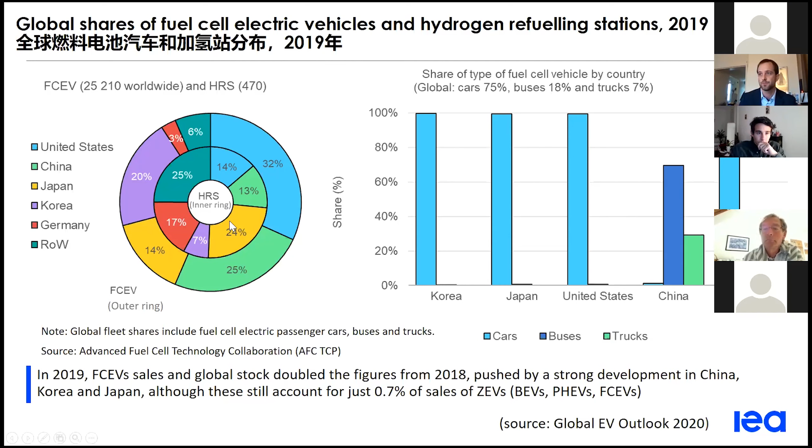But it crucially also includes heavy duty vehicles with high energy and power needs operating on fixed and ideally hub and spoke routes and fueling at single and large hydrogen refueling stations. And by going the route of commercial vehicles that operate intensively as opposed to private cars that stay parked 95% of the time, and by taking advantage of byproduct hydrogen from chemical industries like chlor-alkali production, China has found a niche where the high initial capital costs of rolling out vehicles and their infrastructure are offset by delivering hydrogen at low prices.

So where do we stand then in terms of what many countries are hoping is the initial stage in a ramp up of fuel cell electric vehicles that will mirror in a lot of ways the rapid market adoption that we saw with battery and plug-in hybrids? In terms of vehicle stock, we went from just under 13,000 fuel cell vehicles on the road in 2018 to more than 25,000 in 2019, almost a doubling. But if we compare this to the 7.2 million EV cars and 2 million EV car sales, then we see that the lag between fuel cell electric vehicles and battery or plug-in vehicles is a little less than a decade. This means that 0.7% of all zero emission vehicle sales globally in 2019 were fuel cell electric vehicles.

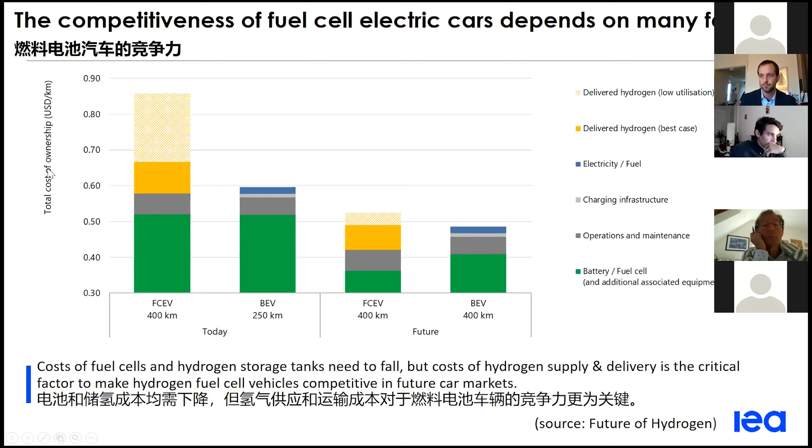Range extenders, as I mentioned, are already being extensively used in various regions of China, Rugao included, where their high utilization plus the availability of affordable hydrogen makes them a valuable asset for the fleet managers that want to maximize the utilization of their assets. In the long term, the mix of low carbon fuels and powertrains will be determined by the trajectory of cost reductions and performance improvements, including in energy and power density, as well as the durability of batteries and fuel cells, and the cost of delivering these two competing energy carriers, electricity and hydrogen.

Assuming that the cost of delivering hydrogen at the pump can be brought down to less than $5 per kilogram, and also assuming that fuel cells can be mass produced to meet the performance targets envisioned by OEMs and the government, fuel cell trucks would compete favorably against battery electric trucks at ranges above around 400 to 500 kilometers, opening up a crucial niche in the regional and long-haul trucking segment, which together account for the majority of today's fuel demand in the road freight sector globally.

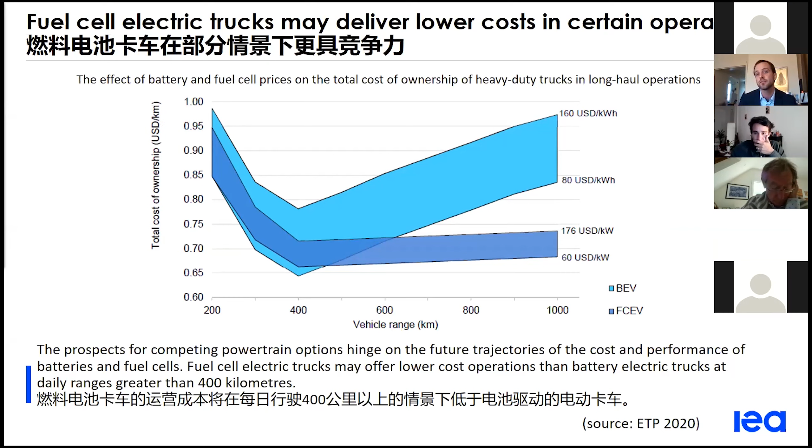Crucially, transport applications, both in the form of direct hydrogen use in fuel cell electric vehicles or hydrogen derived fuels, such as ammonia in the case of shipping or synthetic jet fuel in the case of aviation, are the main demand sector of this growth. While of course, hydrogen is critical also to decarbonizing the chemicals and heavy industry sector. By 2070, hydrogen and ammonia would need to meet more than 50% of the final energy demand in shipping and more than 40% in aviation, and around a third of the demand in road transport, mainly for the use in medium and heavy duty trucks.

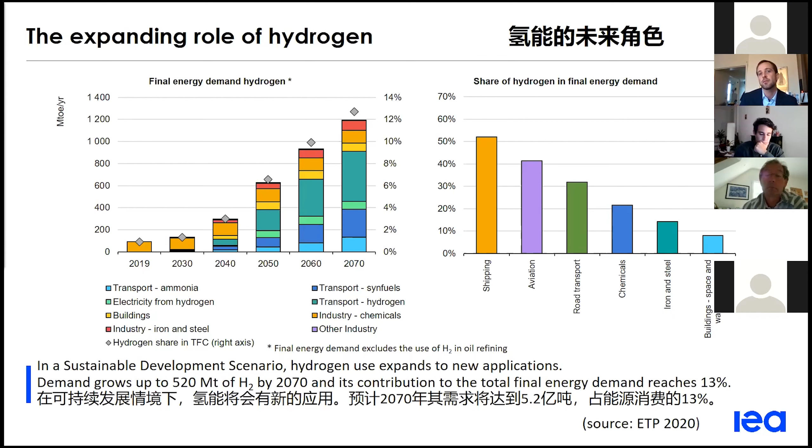In the sustainable development scenario, the rapid ramp up in low carbon hydrogen production is not achieved based on green hydrogen alone. Rather, SMR and coal gasification production will need to be equipped with CCS, or even potentially with ways of using emitted carbon, especially in the initial stages where cost barriers for electrolysis with renewable electricity are likely to simply be too high to overcome.

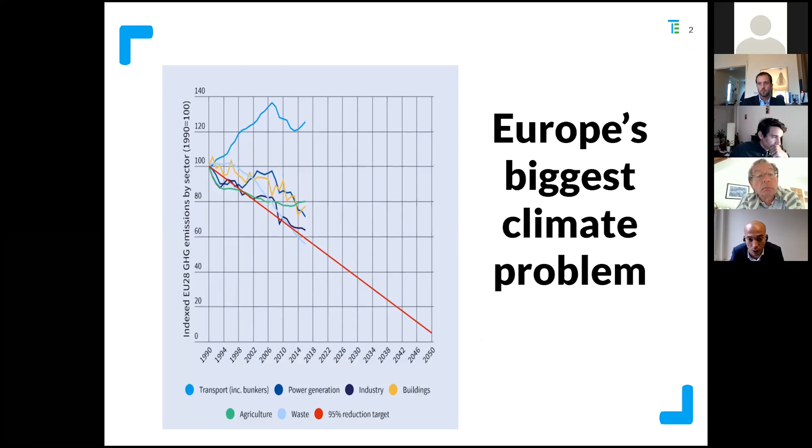I think the starting point, and this is well known to all of you, is that transport is now the biggest climate problem that we have in Europe, and I think that's true across major developed economies that transport is really the major issue we have. We haven't managed to reduce emissions since the 1990s, and actually pre-COVID, the last couple of years, emissions were going up. Now, in Europe, most of the emissions still come from passenger cars, light-duty vehicles with vans, then it's trucks, and then the two hard-to-abate sectors, aviation and shipping.

Now, our challenge is to completely decarbonize this system in the next 30 years. And what that means is that we're going to have to completely replace petroleum fuel by a different type of fuel, a zero emission fuel or zero emission energy system.

The starting point for us in this discussion, and we've been following the energy debate very closely, because the energy system is the basis for what happens in the mobility system. And the clean power revolution that we have seen over the last 15 years has completely changed the way we look at the future of the transport sector. I come from an organization where 10 years ago, we were working on fuel economy standards, on efficiency, because we wanted to optimize everything as much as we could.

The rise of clean electricity, which currently accounts for almost 60% of European electricity, has completely changed the game. And so the basis of a future zero emission mobility system will be clean electricity. Just to reiterate, we are making fantastic progress on electricity across the world, but also particularly in Europe. Now, there are two main options in the transport system to decarbonize based on electricity. Either you do it directly or you do it indirectly. I think that's well known to all of you.

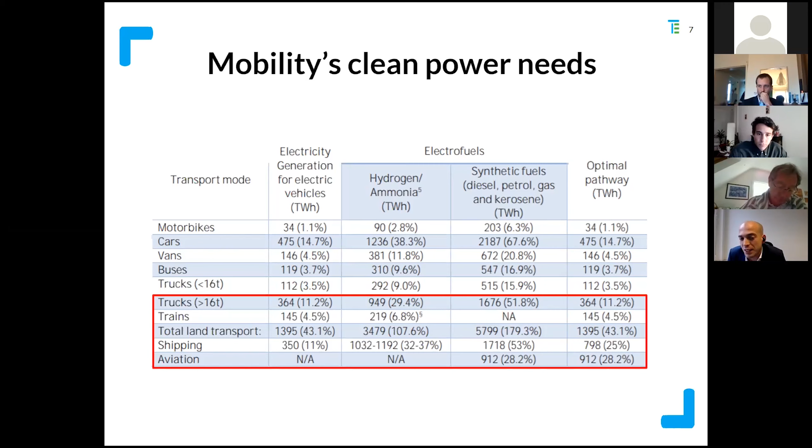Now, I think it is not for us as a green group, or maybe not even up to policymakers, to specifically decide which technologies are used in which sectors. I think we need to give the market a chance, but I think it's an important consideration. If we would go for a complete hydrogen economy, the electricity needs would be incredible.

Now, there's a big discussion also, and that was shown in the IEA slides, we're not just talking about green hydrogen, we're also talking about blue hydrogen. There is potentially a role for blue hydrogen, but there are also some serious concerns about the ability of blue hydrogen to actually achieve the emission reductions that we need to go towards a Paris compliant world. And if you look at this slide, some of the emissions associated with blue hydrogen can maybe be mitigated further, lowered further, but it's a real concern.

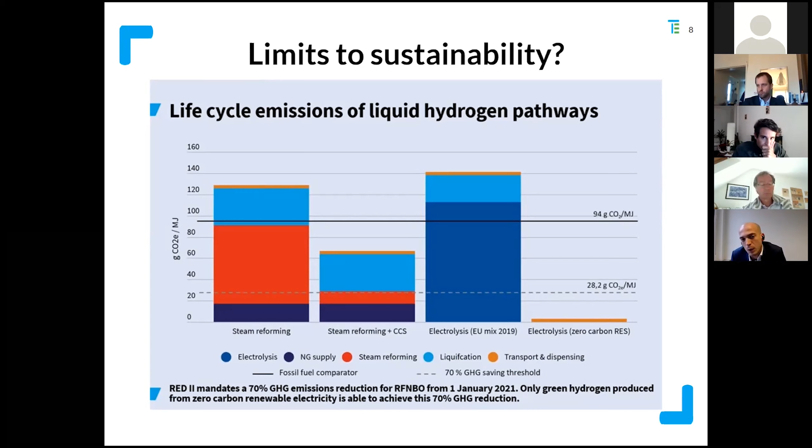Now let me go through the different modes, and let me start with the modes, though I actually want to spend most of my time talking about trucks, because that's what I'm most interested in at this stage, where I have a number of questions also to the other panelists. But where I think it's pretty straightforward is the passenger car sector.

If you look at the European car market, not my opinion, not anyone else's opinion, you just look at what car makers are planning to produce in the next 5 years. They're not planning to produce any significant number of fuel cell vehicles. If they're not planning to produce them, they're not planning to sell them, and that to me says that the race in the passenger car market, as far as I can tell, is essentially over in Europe.

And I think it might well be true that the type of scale up that you need is similar to where we were with cars 10 years ago. But meanwhile, the battery electric sector has advanced quite a lot. If you look at the investments that are happening right now, the gigafactories that are being built, I think it's going to be extremely hard, if not impossible, for hydrogen cars to catch up.

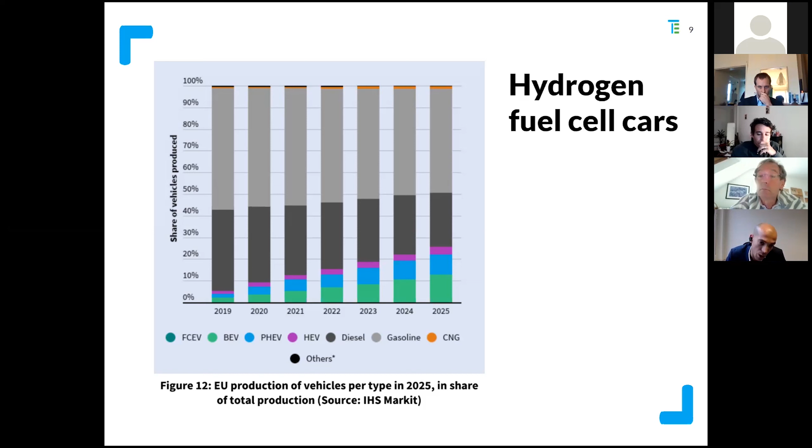Where I think it's also pretty straightforward is the aviation sector, and I very much agree with the analysis that was shown by the IEA. In aviation, there is no alternative to hydrogen or hydrogen-derived fuels, particularly drop-in fuels such as e-fuel, synthetic kerosene. I think it's really encouraging to see that the European Commission is considering a mandate that would require airlines to start using a progressively growing share of sustainable aviation fuels, but in particular also hydrogen-based e-fuels.

The situation for the shipping industry is very similar. Shipping cannot conceivably be decarbonized by direct electrification. You cannot do biofuels at the scale that is required to supply that sector with energy. So the only scalable and sustainable option that you have at your disposal is either hydrogen or a hydrogen-derived fuel such as ammonia.

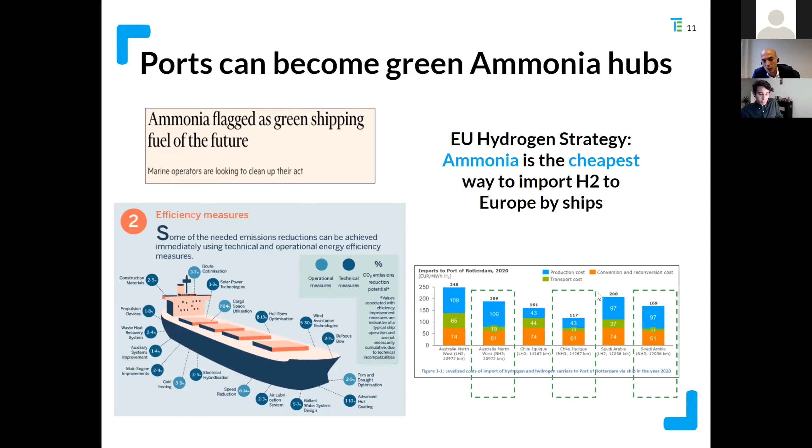Now, let me focus the rest of the presentation on the heavy-duty segment, because this is really where most of the discussion in Brussels is focusing. We have no view on whether it should be battery electric or hydrogen, but we've been trying to understand what the pros and cons of the two solutions are. And based on the modeling and the estimates that we make, we think that actually it's a very, very close race. I'll share the slides so that everybody can have a look at the assumptions, and you can criticize them and tell us that we need to change them.

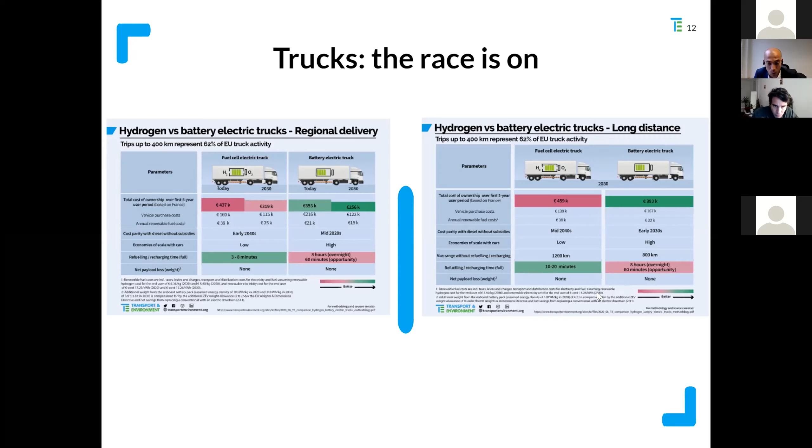But the main thing that hydrogen has going for it is that, from a refueling point of view, it is just much quicker, and the flexibility it gives to the haulage sector is much greater than battery electric potentially. From an economic point of view, we actually think that battery electric trucks could be quite competitive. We also think that the weight issue that has been much talked about is much smaller than people think, because weight exemptions have been granted to heavy duty vehicles in Europe, which means that most of the additional weight of the battery of the truck, you don't have to count it according to EU regulations. So there's no weight penalty from battery trucks.

Now, if you look at what I see as the main challenges for the two technologies, I think it's clear that for battery electric trucks, there's a big issue with range and a big issue with charging. But the idea that we could run trucks on batteries for 400 or 500 kilometers is no longer inconceivable. There was the announcement by Tesla some years ago, but now we see that European manufacturers such as Daimler, the biggest truck maker in the world, are also coming forward with a 400-kilometer battery electric truck. And so as the costs go down and as the density of the batteries goes up, to go to vehicles that can do 500, 600, 700 kilometers on a single charge is no longer inconceivable.

Then the issue becomes, can you roll out a charging network that is sufficient to supply those big trucks with the big energy needs they have? I think that is one of the main questions. There's also a question on grid stability, and the question is, can we get sufficient scale in batteries to reduce the costs so that it becomes attractive for the trucking sector? I think similar concerns exist on the other side.

On the hydrogen side, the question is, can you get the cost of the hydrogen fuel distributed and delivered at the pump down low enough to make it cost competitive and attractive for the haulier? Can you roll out a hydrogen refueling system across Europe? Can you get the hydrogen from the big pipelines? Because people now seem to think that the cheapest, most convenient way to ship hydrogen around is a pipeline. So how are we going to get hydrogen to places where we don't have pipelines? And I think this is really my main question. Can we get the scale for the fuel cells and for the tanks in what is, in the end, a relatively small sector? The logic was always we're going to get scale in the passenger car segment.

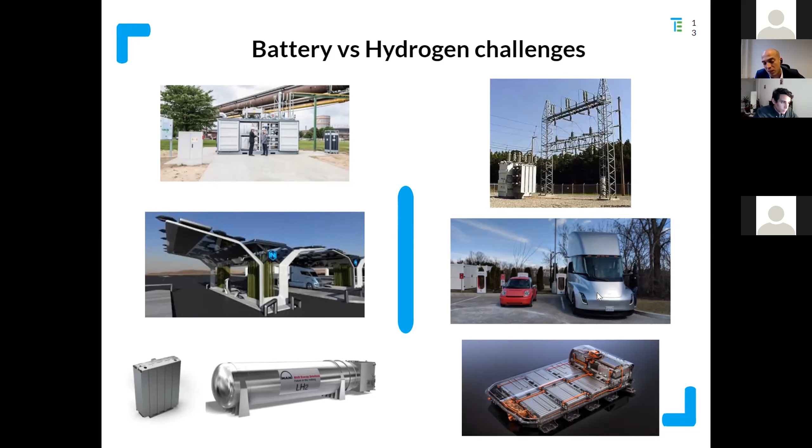In Europe, that's 15 million cars a year. That's a lot. It's a lot of vehicles. If we have to do this with what is only part of the trucking sector, can we still get the scale and can we still get the cost down? Those are questions. And then also a reminder.

Actually, a lot of time is spent talking about ultra long haul trucks that do 1,000 kilometers. The vast majority of trucks in Europe, and that also is true for other parts of the world, don't actually drive 1,000 kilometers on a daily basis or on a trip basis. Trips are much shorter. Now, and I will end it here.

I think the most important thing is not the discussion about which technology will work best in what situation. We don't need to make all those choices. The market can make those choices. The question is, how do we create scale and how do we go from hype to hope? And I think the experience that we have as an NGO is that the role of regulation is really absolutely essential.

We're seeing the share of electric vehicles sold in Europe grow from 3% in 2019 to 10% in 2020. This is because of the CO2 standards. We expect something similar to happen in California, where they've introduced a zero-emission truck sales mandate. Once truck makers have to sell those vehicles, they will look for the cheapest, best, most optimal solution to comply with the targets. And so, it is important to spend a lot of public money.

R&D is important. The Hydrogen Alliance is very important, but the most important thing, in my view, is to create a regulatory framework where we give investment certainty to the entire hydrogen ecosystem, so that the investments can be made to supply aviation with e-fuels, to supply the shipping industry with ammonia, to potentially supply the trucking industry with hydrogen, and also supply truckers with the vehicles.

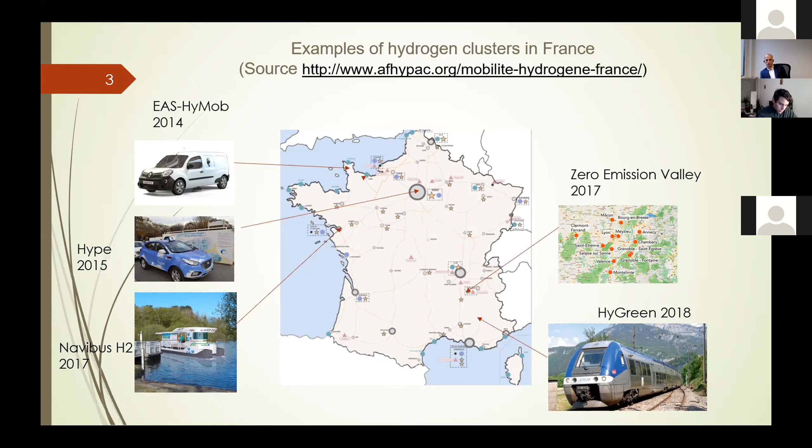So we have some lessons to draw from these 3 experiments. The problem is first a local challenge. A local challenge is that hydrogen refilling stations have a high setup cost. They need to be filled with demand, and this is not as easy as it could seem. The way is to build on a captive fleet, such as these taxis, and the opportunity to build on captive fleets in the 2 other projects I mentioned was quite difficult.

In the future, we may think of mutualizing usage. For example, there will be regional hydrogen trains developed in Europe, and in particular in France. That may be an opportunity to mutualize usage and facilitate the profitability of hydrogen refilling stations. Another problem is that this project requires the elaboration of a financial business plan that will gather subsidies at the local, regional, and European level, which is not so easy to organize.

We can see, as was mentioned in the presentation just before, that there is a low involvement of European car manufacturers. That's also the case in France. The energy suppliers, on the other hand, are pretty well engaged in hydrogen deployment. Now, there is also a global challenge, which partly explains why it was so difficult to generate volumes in terms of vehicles. This has been mentioned also. It's the high purchase cost of vehicles.

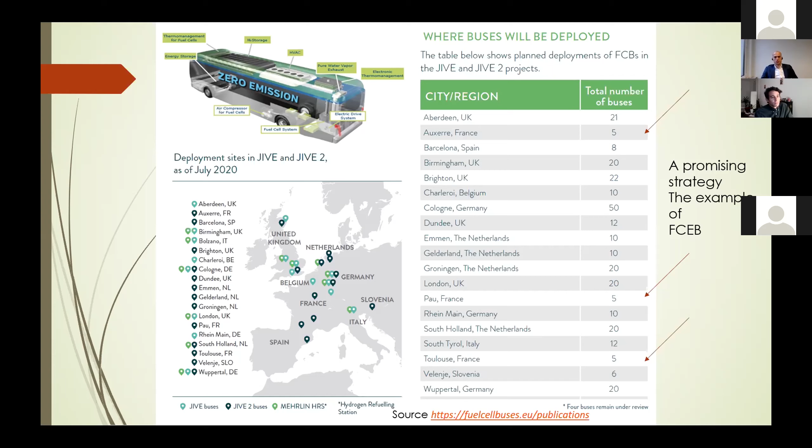Staying with this example, we can see that this program has generated quite a high level of competition in producing fuel cell buses in Europe. You have traditional manufacturers such as Van Hool that are a large part of that, but there have been new entrants such as Safra in France. There's also CaetanoBus in Portugal, and a number of other entrants. So the competition in the market will certainly be good for reducing the high cost of the bus.

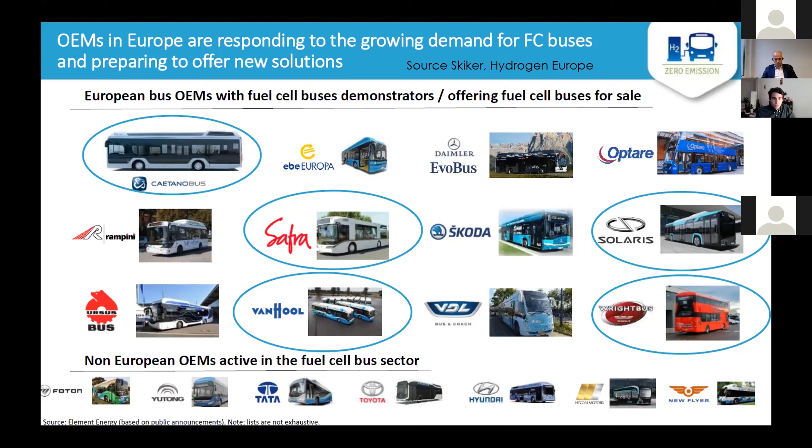So this I think is interesting in the sense that, to solve this local and global challenge for the deployment of hydrogen in mobility, we can think of a scenario that involves 3 stages: a takeoff stage, a powering up stage, and a cruising stage.

If we consider battery electric vehicles, we may be in a number of countries in the powering up or cruising stage. In particular in Norway, we certainly are in the cruising stage. At that stage, you can withdraw a number of public subsidies, at least as long as you have a reasonable carbon tax. At the powering up, you should try to facilitate exchanges between the regional clusters.

But in many countries, I think in Europe, we are at the takeoff stage for hydrogen deployment. And I think it would be a bad strategy to try to jump too quickly to the second or the third stage. That would be my global recommendation for the deployment of hydrogen.

These considerations derive from a number of publications that I will not go through here. There are also some articles for a larger audience. All of them are actually available on the website of the Chair Energy and Prosperity.

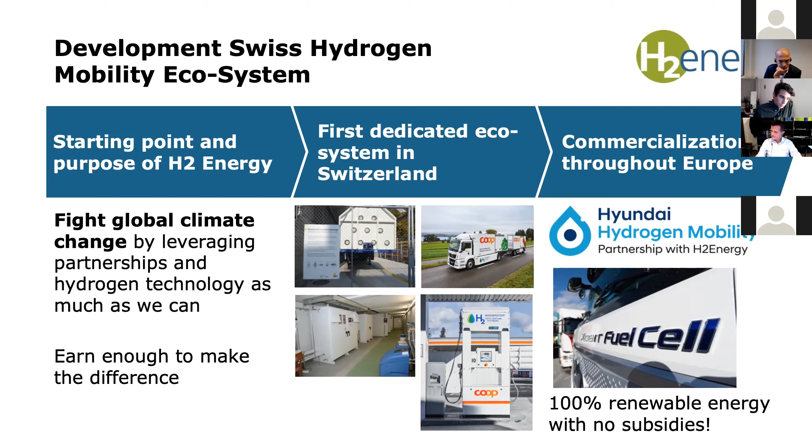And why Switzerland? Because in Switzerland we could really make it work from the very beginning. We had very limited resources available, and the first project was heavily, nicely subsidized, I would say, by the Department of Energy in Switzerland. I'll come to that later. But in Switzerland, if you scale up an idea, you will not find any subsidies. So we had to be viable from an economic point of view from the very beginning.

And now we have one advantage here in Switzerland, and that is a road tax that we have, because if you drive through the Alps, you have to pass the tunnel of Gotthard, and since everybody was passing this tunnel, there was a huge political debate, and on top of that, there was a tax applied to all the trucks in order to subsidize a train line that would load the containers from north to south.

So that was actually sort of an emission tax, and there were some exemptions from that tax, which were electrified trucks, because at that point of time there were no electrified trucks. So if you have an electrified engine, you are exempted from that tax, and that tax is pretty massive, and it's based on the payload times the distance that you would cover.

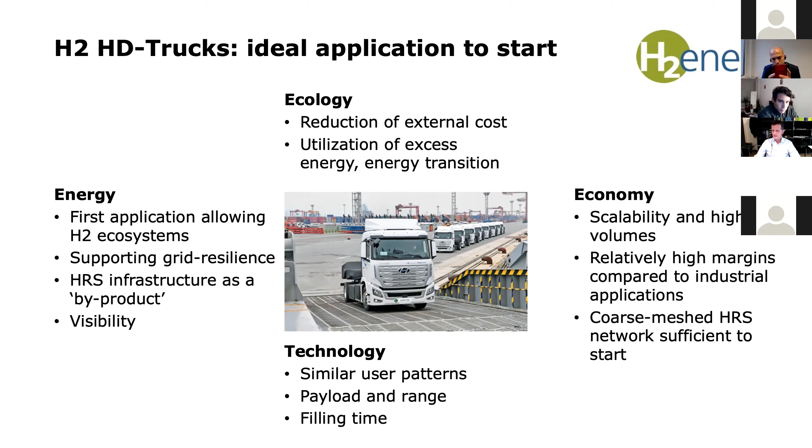And on the back of this project, as kind of a byproduct, we are now seeing a hydrogen infrastructure being developed with absolutely zero subsidies. And how does that work? I think that's the key logic behind it. What we have is really an entire system. And what are the pros and cons of this entire system?

The cons are that it's very complex to build, and it's rather difficult to get all the people together. But you don't have any excess capacities, so you have to think about all the value chain elements, the value that they create, and also the margin they need to generate in order to do this. So actually you should go the other way around.

So we built the system such that we made the trucks function. And with that, we knew exactly what the trucks at the max were able to pay for the renewable hydrogen. And we only did renewable hydrogen. There is not one kilo of non-renewable hydrogen that we fed into the trucks. And then we saw how much margin the hydrogen refueling station needs in order to build, and how much these other guys will need in order to generate the electricity.

Here you see a run-of-the-river plant in Niedergösgen. In this space is now this equipment, which is a 2 megawatt PEM electrolyzer. And here you see exchange containers. So we designed an entire system, talked with all of the parties, and made everybody earn enough. They always complain, of course, they would love to earn even more, but just enough to actually do it. And so what you see here is actually 3 parties.

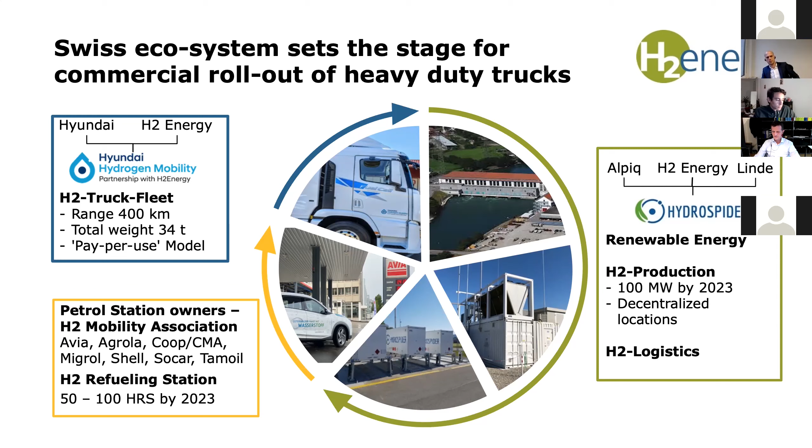We plan for 1,600 trucks in this model. And up until then, we will have roughly about 100 megawatt by actually 2025. It says 2023, but it will be 2025. It will be 1,000 trucks by the end of 23.

Yeah, probably some of you have already seen some impressive pictures. We have also handed over the trucks recently to the customers. And now the customers are doing all this social media stuff for us. They're very proud. Everybody has its own movies now, and it really gets going. And now we have 20 trucks out there. We have 30 more to come this year, and it will basically pile up. Next year we will receive about 150, and then Hyundai puts it on the larger line with the capacity of 2,000 vehicles.

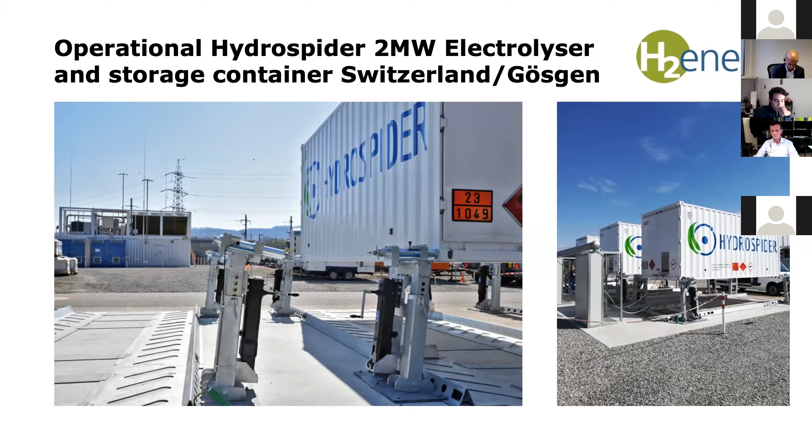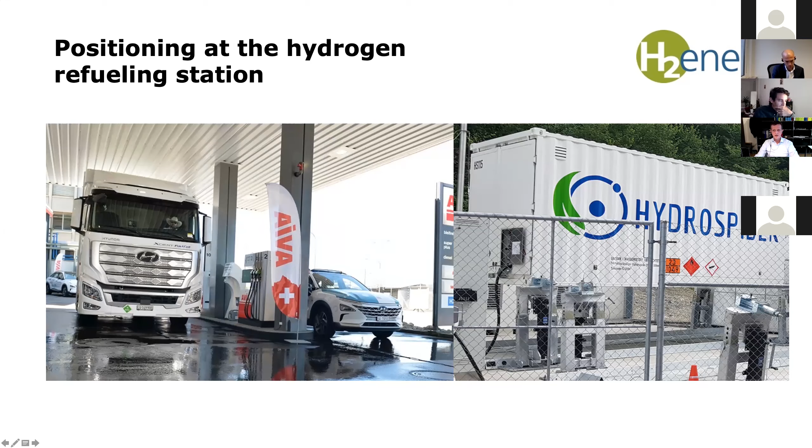Here you see from a different angle the 2 megawatt side here, the process unit with the compressor. Behind that you see the power supply, the cooling unit. Underneath there are some pipelines feeding into these exchange containers with filling panels. We had to, with some engineering company, construct this element where you can drive underneath and very quickly pick up the 20-feet container and then basically transport it right to the stations. This is on the backyard of the station, and here you see the station in St. Gall with the truck.

Now, I was asked to describe the roadblocks: what were the challenges up to now and what are most likely the challenges to come. I think the biggest challenge was really getting everybody together. Not only getting them together, but actually generating their appetite to invest in the initiative. There's always the fear that somebody is earning more or less and whatsoever, and that was really, or still is, quite a challenge.

And then we had to design the business model because we were doing the private funding thing, and we didn't use any subsidies in the commercialization. There's a lot of cultural aspects and so on and so forth, this other stuff. I mean, COVID also did not help, of course.

The challenge to come, I think, the competition is way too slow. Also, the technology in Europe is really lagging behind. There's a lot of discussions, but I would rather see some more activities in the technology development. And also there are so many distractions from large numbers that all of these people talk about. Those are sort of the challenges that we see currently. We would much more like to see a more open market and more entrepreneurial spirit in actually what we do.

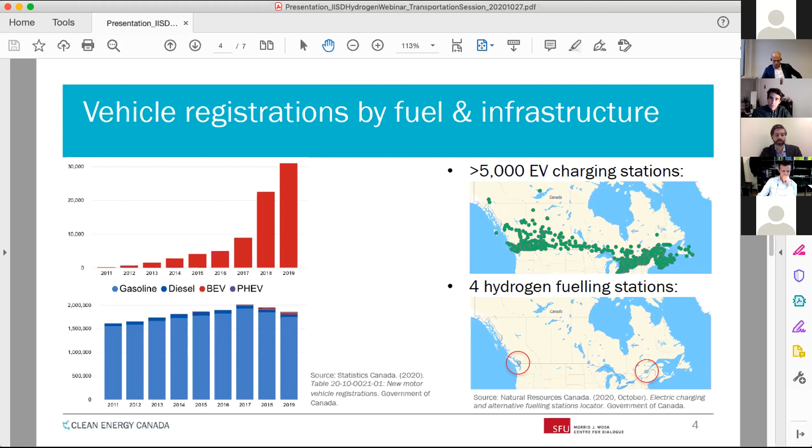So I talked about the new vehicle registrations. Those are the graphs on the left. And I should say that fuel cell electric vehicles cannot be seen on these charts because so far they're close to zero in Canada. Statistics Canada, the government agency collecting statistical information, is actually not reporting fuel cell electric vehicles separately. They're combined in a category together with vehicles running on liquid propane and natural gas. And for all of these, there were less than 200 new registrations in 2019. As for infrastructure, there are currently more than 5,000 electric charging stations across Canada, but only 4 hydrogen fueling stations so far. So there's significant growth in zero emission vehicles, but so far that's been only battery electric and not hydrogen fuel cells.

Hydrogen solutions are expected to play a significant role, especially for decarbonizing segments like heavy duty, long distance trucking, where batteries are not likely to be technically feasible, especially for really long distances. I suspect that they would be much longer in a vast country like Canada compared to the European situation. And according to Bloomberg NEF, with the necessary policy support, heavy-duty vehicles could actually be cheaper to run using hydrogen than diesel by 2031.

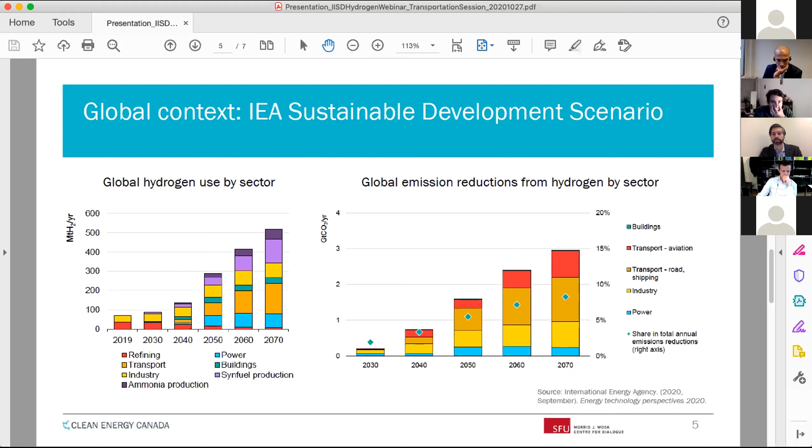Now let's look at some activities on hydrogen for transport in Canada. So in 2017, hydrogen tech companies in Canada had revenues of more than $200 million and employed over 1,600 people in the country. Companies based in Canada include Ballard in British Columbia. That's a well-known developer and manufacturer of fuel cells.

Hydrogenics in Ontario, which builds hydrogen generation and fuel cell products. They also have a power to gas demonstration plant that is running in Ontario. New Flyer in Manitoba, which is North America's largest manufacturer of transit buses and motor coaches. They have assembled fuel cell buses for demonstration projects in the past. And companies like HTEC in British Columbia, which provides hydrogen supply solutions, including fueling infrastructure.

I also want to mention a rail project. In 2018, the province of Ontario released a favorable feasibility study for exploring the use of hydrogen fuel cell powered trains on its GO transit network. So there was a favorable feasibility study, and hydrogen for freight was actually identified as a key area in Ontario's climate plan at the time. Unfortunately, there has been a change of provincial government, and we haven't heard much about this project since then.

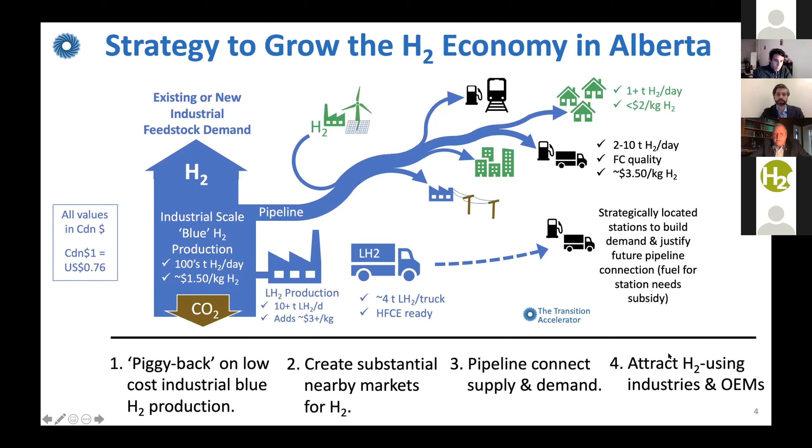The place to start this in Alberta is the Edmonton region. I'm from Calgary, so Edmonton's a competing city. But I have to say that they've got all the cards.

What they already have is a 50-kilometer long hydrogen pipeline that starts near the city of Edmonton and goes to the northeast. And there are 2 CO2 pipelines already built and in operation. This region already produces about 2,250 tons of hydrogen per day. It's a highly industrialized region, and about 850 tons of hydrogen a day produced by these 3 facilities are already coupled into carbon capture and storage and are producing blue hydrogen. The city of Edmonton has a population of about 1.1 million people, so we're looking at opportunities to create markets for blue hydrogen production in that region.